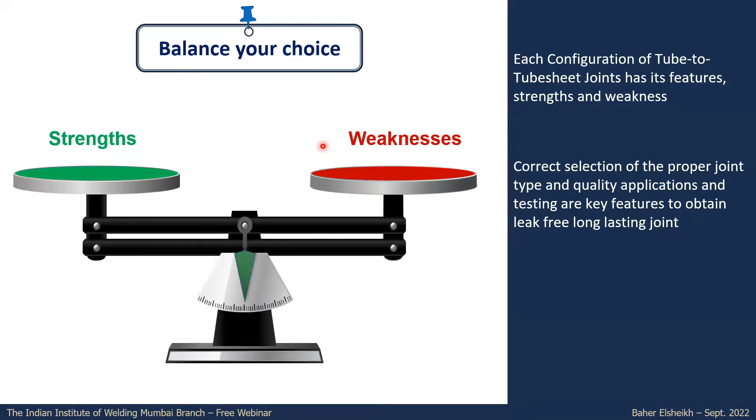Now for the different types of tube to tube sheet joints, there is no one selection that suits all applications, either from the application perspective to have the proper design or characteristics of the joint, or even from the cost perspective. That's why you need to think about the proper joint for each case. Each type of joint has its own strength and weakness, so you need to balance the features for each joint and then select or apply the proper one for your application.

Now for the expanded only joint, it is the most economical one. There is no welding associated with this, and it is easier to retube in the future. So if you're looking at future maintenance or repair, it is much easier to remove the expansion and remove the tube and reinsert again, rather than removing welding and re-welding. For future plugging with expanded only, you can easily use a taper plug, which is very simple to apply. And there is no tube sheet beveling required, meaning the machining of the tube sheet face is not required, so it's also much less work activity.

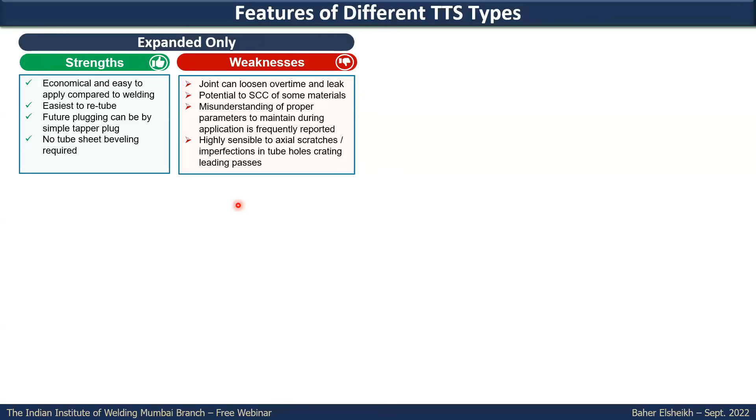But as weaknesses, it can be loosened over time, especially under cyclic load, or temperature, or high differential pressure between the two sides. And in some cases, it is potential for stress corrosion cracking if you have that much high residual stress in the application. That's why for some materials, as we'll see later, you have to limit the extent to which it will be expanded. And it's not something strange that there are frequent reports of the proper parameters not being maintained during the application of expansion, which in some cases led to frequent leaking or issues with the heat exchanger. So it looks simple, but it has its own experience and technical requirements, and it's highly sensitive to axial scratches, because once you expand the tube with the tube sheet, it will take the shape of the tube sheet hole, including imperfections and scratches.

Expanded and seal welded is much better compared to expanded only. You will have more leak resistance and sealing against leaks. So it is somehow much preferred compared to expansion alone whenever you have a slightly higher critical service, where there is no tolerance accepted for a mix between the two sides.

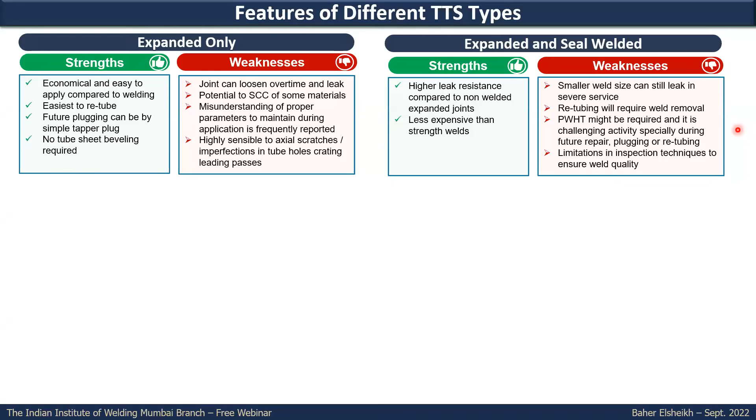The weaknesses for this one: the small weld size is still somehow vulnerable to leaking in case there's some issue in the joint. Retubing in the future will require weld removal, so more work is required. And in case post-weld heat treatment is required, especially for certain services, it will be of interest during the initial construction. The main concern here is doing post-weld heat treatment at site during plugging or retubing. It's not easy to achieve uniform application of post-weld heat treatment, and there's also the limitation of inspection techniques for the weld, which is a common limitation for all weld joint types.

Strength welded but not expanded: you can apply only strength welded without expansion. The weld size is calculated to be strong enough, as we'll see in the ASME requirements, and there is no expansion groove needed for this type of joint. So less machining and less work is required, and there's no expansion step, so that step is eliminated. But it is potential for crevice corrosion, because the backside of the weld will have a gap where fluid from the shell side can accumulate and cause crevice corrosion.

And also there's the limitation on inspection technique, which applies to all welding joint types. Retubing in the future will require removing the weld, reconditioning the bevel of the tube sheet, and re-welding again. And if post-weld heat treatment is required, it's also not easy to apply, especially during repair in the future or retubing. Future plugging cannot be done with only a taper plug.

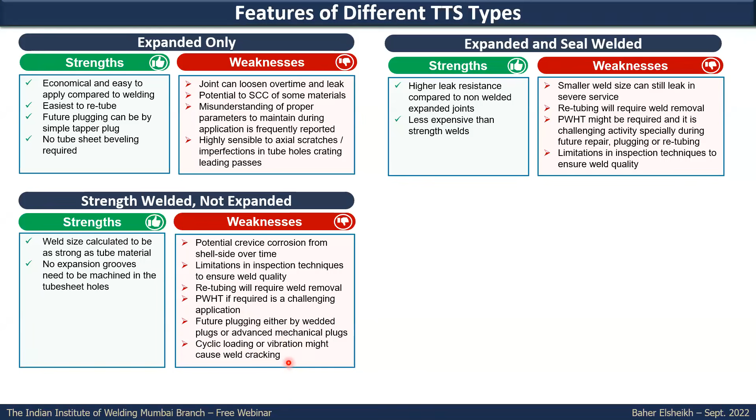You have to either install mechanical plugs or welded plugs. Under cyclic load, in case you don't have the expansion, the strength weld will be subjected to fatigue cracking, and it might crack.

The last configuration may be strength weld plus expanded, and this is the most leak resistant one. You will have the strong weld and also the expansion, which will close the gap. You will eliminate, to a very good extent, the susceptibility to crevice corrosion, and the weakness is that it is a little more intensive work, so cost wise it is higher, plus the limitation on inspection, as we said earlier.

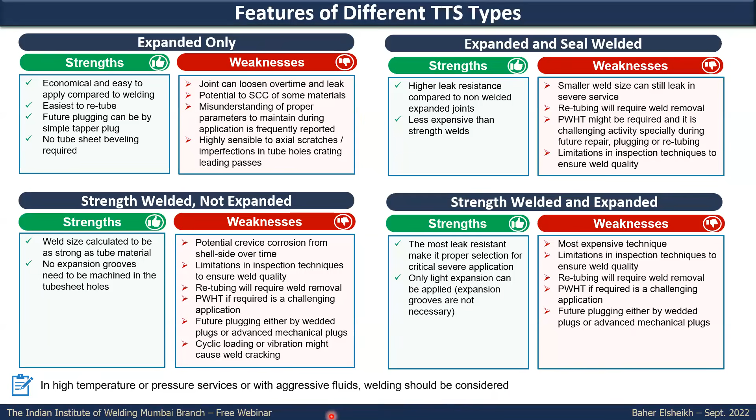And again, all the requirements for the welding here, for future plugging, post-heat treatment if required, where you need to remove the weld or apply weld again, or the application of post-heat treatment at site, which is a very challenging exercise. In high temperature service or aggressive fluid, usually you cannot rely only on expansion. You need to have welding, whether you apply strength weld plus seal plus light expansion, or expanded plus seal weld.

Now for the requirement of the tube-to-tube sheet joint, the percent of expansion. The percent of expansion recommended depends on the material used. Some materials are subjected to work hardening, or some other material might develop residual stresses in future which might cause stress corrosion cracking in service. That's why the percent of application of wall reduction, how much it will be expanded, depends on the material.

For ductile material like carbon steel or low alloy steel, you can apply up to 8%. Between the two common standards in the industry, TEMA, Tubular Exchanger Manufacturer Association, or API 660, the standard for shell and tube heat exchangers, there is some minor variation in recommendation, but almost the same approach or trend on the recommended percent of expansion.

What we can see here is that for duplex stainless steel and austenitic stainless steel, you have a little less recommended target wall reduction or expansion, while for copper alloys and also for carbon steel or low alloy steel, you can apply a higher degree of expansion without any issue.

For duplex stainless steel, we can see in API 938C, for the use of duplex stainless steel, they are recommending light expansion up to 2% only, plus strength weld, meaning you cannot apply only the expansion. But again, this is a technical report, it's a good engineering practice. We saw for some applications that up to 5 and 6% was applied in duplex stainless steel in many cases.

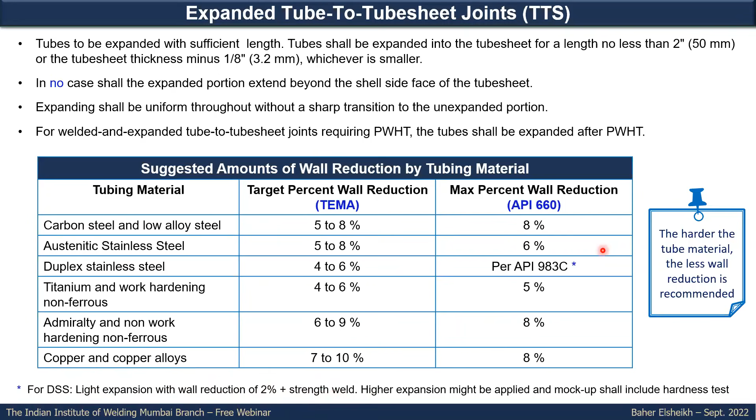Now, one factor that also contributes to how the tube will be affected under expansion is how much gap or clearance there is between the outside diameter of the tube and the tube hole. In TEMA, there is standard fit clearance or special fit clearance, and it is highly recommended to have the special close fit clearance, where there is minor or small gap between the tube and tube sheet hole, so that you don't have more plastic deformation in the tube while applying the expansion.

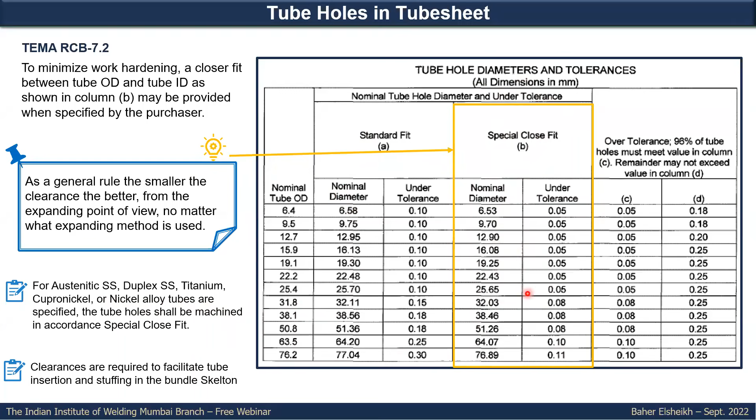Against this, the standard fit with higher clearance is in many cases preferred by the manufacturer because it facilitates the insertion of the tubes during fabrication. But as far as you don't have limitation on the material, you can apply standard fit. The best recommended practice, though, is to apply the special close fit. Especially for austenitic stainless steel, duplex stainless steel, and titanium tubes, you need to apply the special close fit clearance.

For the preparation of the tube sheet hole, it shall be clean, and there is no specific requirement for it to be polished or well machined, because somehow you need a force to grab the tube to the tube sheet hole. But it's very important to avoid any scratches or imperfections in the tubes. As a general rule this should not be there, but we also need to understand that the longitudinal imperfection is considered of higher risk compared to the radial imperfection.

Now, if this is the shell side and the other is the tube side, a longitudinal imperfection means you will have a leak path between the two sides. A radial imperfection is still not a leak path, so you can have some tolerance there. But generally, you should not have any imperfections or scratches in the tube sheet hole.

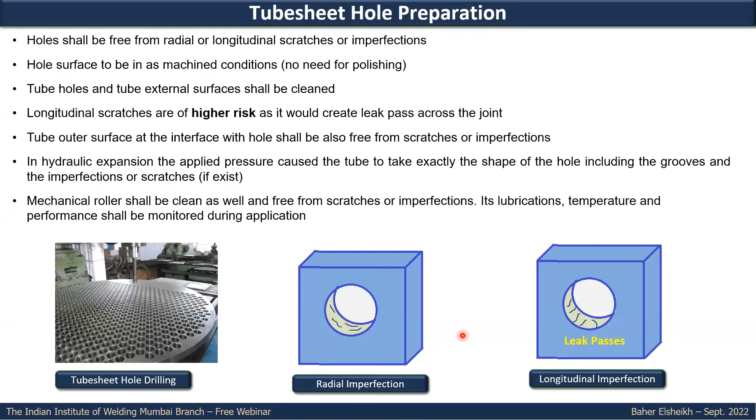When applying the two different techniques normally used in expansion, whether mechanical rolling or hydraulic expansion, as we'll see in the next slide, the hydraulic expansion will force the tube to take exactly the shape of the tube sheet hole, including any imperfections or scratches left in the tube hole. That's why it is very crucial to make it well machined, to avoid impacting the tube in future with cracking or similar issues, or having a leak path between the tube side and shell side.

The three different techniques normally used in expansion are roller expansion, hydraulic expansion, and explosive expansion.

Normally, when we need to apply the expansion, you should have annular ring grooves. The most common is to have two grooves as per TEMA requirements, but there is some exception in case you have a thin tube sheet, with thickness less than 1 inch, where you can apply only one groove.

For roller expansion versus hydraulic expansion, there is a different recommendation for the width of the groove itself. In roller expansion, it is a fixed value like 3.2 mm, while in hydraulic expansion, it is a function of the tube mean radius and the tube thickness.

We will see this exercise in a table, making a comparison for different tubes with different thicknesses, showing how much the width of the groove might be required for either mechanical roller or hydraulic expansion.

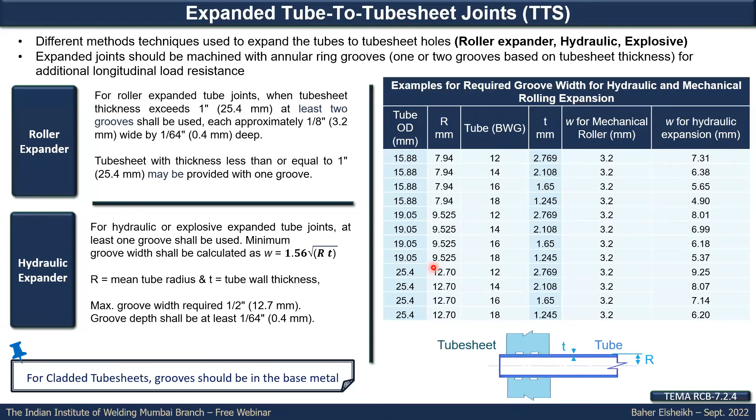You will see a major difference for the recommended hydraulic expansion width. By experience of some manufacturers, it is very important to maintain a bit higher width for the hydraulic expansion to achieve proper sealing. Especially in hydraulic expansion, the tube will take the shape of the groove because you apply pressure. So if the groove width is very small, the tube will be forced to take this shape, leading to localized high expansion, which might cause stress concentration at the edge of the groove, and in future could lead to cracking or stress corrosion cracking on some surfaces.

This is the application of the mechanical roller. There are different tools and types of mechanical rollers, with different manufacturers working on that. You need to understand that this field has its own specialty, and in many cases you need to consult the manufacturer of the tool.

There is good recommendation, well known from experience, for the roller application regarding how much pressure to apply, whether in one step or a stepwise application across the tube sheet, and how many rollers are required. For thin tubes, 5 rollers should be applied.

You also need to think about the ligaments between the tube holes, which differ depending on the pattern. We have 4 types of tube pattern: triangular, rotated triangular, square, and rotated square. In the rotated square and square patterns, you will find a bit more material in the ligament area compared to the rotated triangular and triangular patterns. This means that under the same force causing deformation in the hole, the triangular pattern will show more deformation compared to square or rotated square, assuming the same tube sheet material and thickness. This needs to be considered.

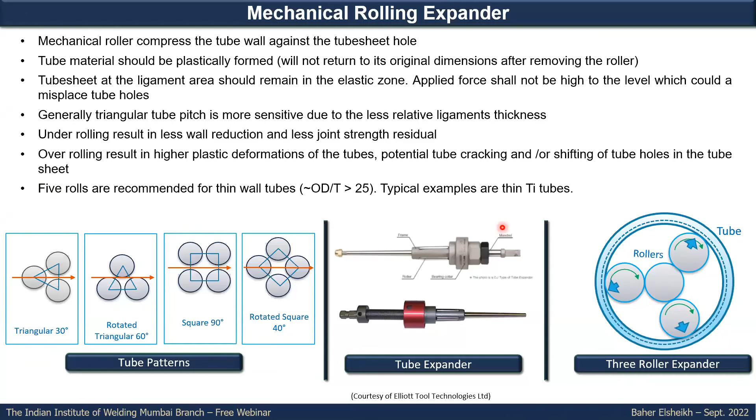The hydraulic expansion is applied by using hydraulic pressure in a tool inserted into the tube sheet hole area, and by applying the pressure you force the tube to seal against the tube sheet hole. This application, as mentioned, might be done without a groove in some cases or with grooves. In hydraulic expansion, the uniform application of pressure forces the tube to take exactly the shape of the groove, if present.

This is not usually the case with mechanical rollers, because the mechanical roll will have a little bit longer length, so the groove will come somehow within an area of the roll. So the roll has a maximum OD, and it cannot go beyond the maximum OD of the roll itself.

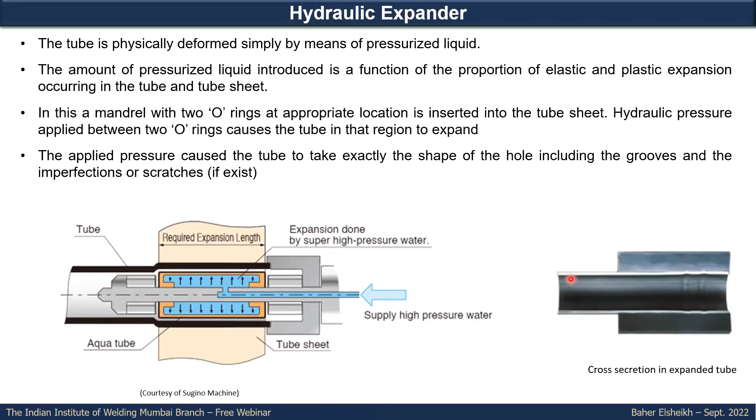But in hydraulic expansion, it is pressure that forces the tube to go and do more plastic deformation in the groove. That's why the width of the groove in hydraulic expansion needs to be well respected, like the recommendation in the TEMA and manufacturer guidance. It has a little bit wider width.

Now we come to whenever we are applying welding for the tube to tube sheet joint. Welding can be either manual or automatic, using orbital welding techniques, usually applying gas tungsten arc welding. It is highly recommended to have a minimum of 2 weld passes, and this recommendation you will find in many standards, including API 660. Two weld passes as a minimum, and might be more.

So in the selection of the filler wire, you have to respect achieving this during the application and qualification of the WPS.

One of the challenges while welding the tube to tube sheet joint is the relatively high thickness of the tube sheet. You have high heat sink, which causes a high reduction in temperature during application of the weld. That's why for materials where you need to maintain interpass temperature to avoid issues, there are recommendations for some materials.

In such cases, you might need to apply preheat, and this preheat application should be applied uniformly on the tube sheet. Otherwise, you might have an issue in the ligaments area in some thin tube sheets. This will be a very big challenge if you are working in after service for repair or doing some activities on the tube sheet.

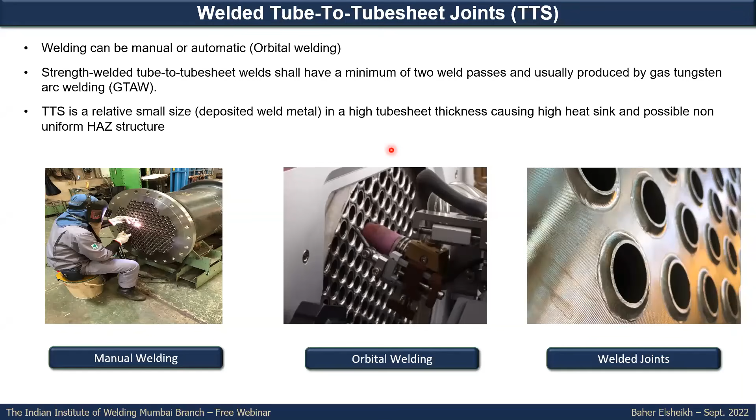Or one of the common recommendations, instead of the normal V groove, is to apply a J groove. J groove, or U groove, compared to the normal V groove, gives you a better chance to achieve full penetration of the root pass compared to the V groove, especially for small joint sizes.

And there is much known limitation for inspection of this weld joint, especially at the root pass. So in this case, it is highly advised, and in some specifications from well-known companies in the industry, they recommend only using the J groove because of this reason.

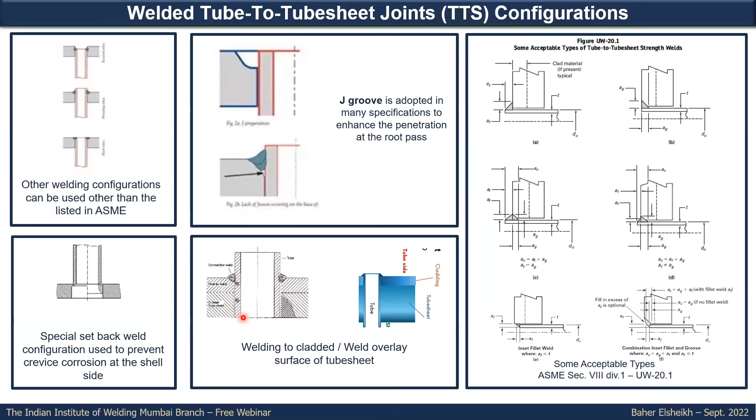In some other applications, you might apply the tube-to-tube sheet joint to a cladded or weld overlay face of the tube sheet. In some other cases, it is highly advised not to do expansion, like what we can see here, only welding - we will see later why this recommendation is advised. Those are some of the special TTS welding configurations we can see in the industry.

It's not listed in ASME, but it is somehow used in many applications. This one is a special setback weld. We normally see this in the welds of waste heat boilers in the reformer section of ammonia, methanol, and hydrogen plants, where there is a small lip in the tube sheet from the shell side, and the tube also has a lip like a step.

While welding, it will be fused together, so you will totally fuse this part and will not have any space or clearance where there could be a chance for crevice corrosion. This is highly recommended for this service because the temperature here is too high.

And in the shell side, there is boiler feed water. Even with minor contamination of the salts in the boiler feed water, you might have crevice corrosion here, of much higher risk.

And this internal bore welding, where the tube is not inserted to the tube sheet, but it is butt welded to the back side of the tube sheet. This application is called internal bore weld.

This butt weld has many advantages. You will not have the crevice between the tube and tube sheet, and you can also apply proper inspection using digital RT or UT for the weld joints. So you will have very good confidence in the quality of the applied weld as well.

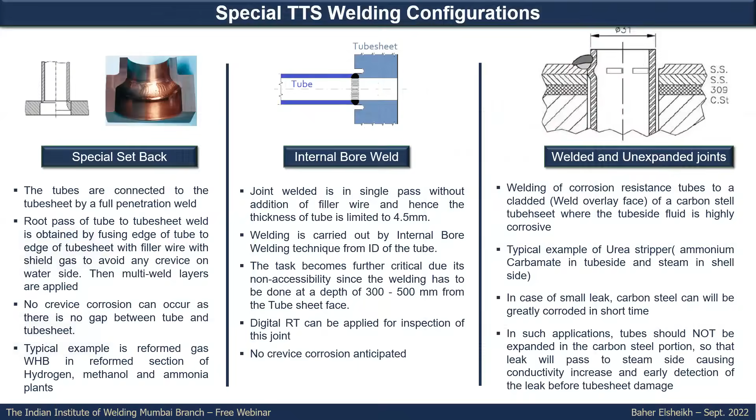Now we will have a look at how ASME Section 8 Division 1 calculates the required thickness or throat for the different weld joints of the tube to tube sheet.

As we said earlier, there are two types of strength weld: full strength weld and partial strength weld, and also, if you remember, the seal weld. But for seal weld, there is no calculation required. It is only a supplementary requirement for sealing by the expansion, so no calculation is required.

But for the full strength and partial strength weld, there are some equations that need to be applied where you can calculate the minimum dimension of the weld required.

And if you can see here, the recommendation for the full strength weld compared to the partial strength weld: the full strength weld is more stringent, as you can see. Here it is whichever is greater, AR calculated from the equation or 1.4 t, while for the partial strength weld it should only be greater than AR. You will see the same for the different configurations.

So as an initial understanding, you will see the AF, the weld size or the weld leg here, should be greater than AR or 1.4 t, meaning under any condition this AF should not be less than 1.4 times the tube thickness. It might be higher, but it should not be less than this. While in the groove, T is acceptable up to T in case AR is less than the thickness.

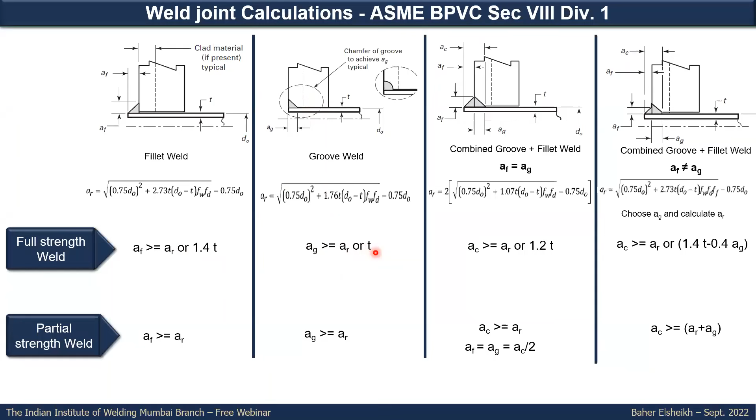We will have later an example of how to calculate it when we talk about the minimum leak path. Now for the welded and expanded configuration.

There is a very famous question asked many times when we have the configuration between expansion and welding, both applied. What do we have to do? Expand first then weld, or weld first then expand? There is no single answer that says this is highly recommended, but you need to understand the pros and cons for each application, so you might select the most proper choice for your case.

If you are doing the expansion first, then the welding, the expansion will close the gap between the tube and the tube sheet hole. So in this case, while applying the weld, you will close the gap where the weld gases should escape.

So you might have a higher chance of weld porosity, especially in the root pass of the weld. Also, the welding after the expansion, the heat from the weld and maybe from the post-weld heat treatment, if required, will cause some loosening of the expansion. So whatever expansion you have done earlier will not remain intact after applying the welding.

One feature of doing expansion first is that you can do some testing, like a leak test or hydro test, to confirm that your expansion is intact before applying the welding. But if you think of the opposite, welding first then expansion...

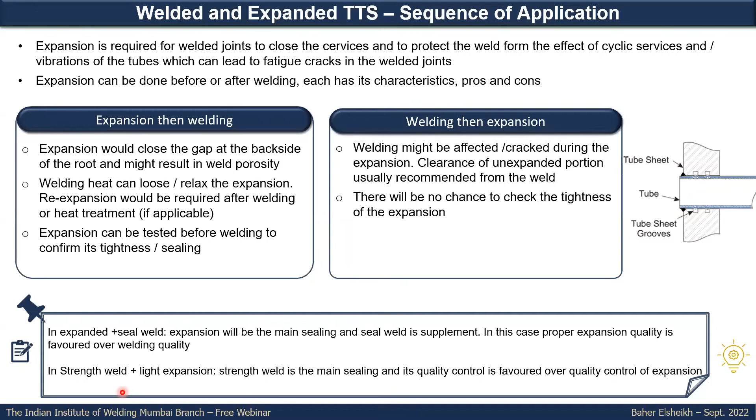For the application of the cladding or weld overlay tube sheet, it is required to apply the cladding to the tube sheet in many situations, like having corrosion resistance of the tube sheet face in case you have corrosive media, instead of having a solid tube sheet from a higher material or high corrosion resistance alloy.

This is done to reduce the cost or the fabrication requirements, so only the weld overlay or cladding surface will be applied here. In some other cases, it's also to avoid a dissimilar weld between the tube and the tube sheet.

So if you have matching material from the cladding layer or weld overlay layer with the tube, you'll avoid the issue of the dissimilar weld, which can cause cracking under thermal expansion, or also avoid galvanic corrosion.

In some cases, we are applying the weld overlay so that in future, whenever we need to apply plugging and the plug needs to be welded to the face of the tube sheet, you will not require heat treatment. So if the base metal is, for example, chromium-moly steel, and you applied some grade of austenitic stainless steel or nickel alloy, in future if you need to plug and weld to the tube sheet face, you can do it easily without needing to apply post-weld heat treatment again.

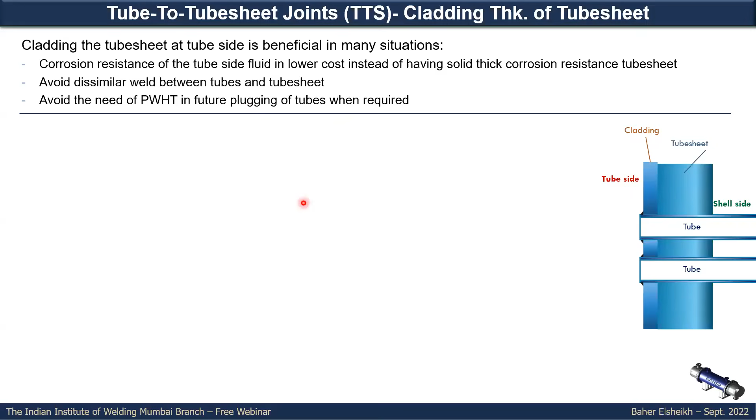We will notice something here about the recommended clad thickness. In case we have to expand only the tube to tube sheet joint, the clad thickness should usually be higher compared to the requirements when you have welding.

Why? Because in case you need to do sealing by expansion, you should have enough sealing distance between the material of the tube and the alloyed clad part. Otherwise, if it is a small expanded part, you'll have a higher chance of the media escaping to the lower grade material, which might be affected by corrosion.

But in welding, the sealing is done by the weld to the clad, so you don't need much higher thickness here. You only need enough thickness to respect the corrosion resistance and account for dilution in maybe the first or second passes between the clad material or weld overlay and the tube sheet.

We will see the same approach applied in two standards, API 660 and TEMA. In API, they are asking for 10 mm cladding thickness in case you have expansion, and 5 mm in case you have welding.

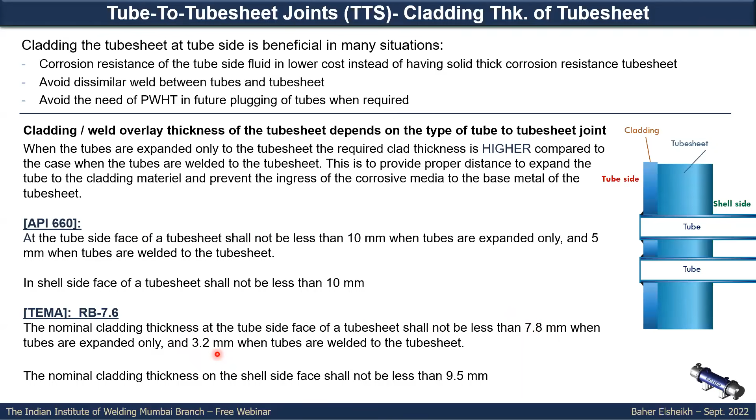In TEMA, the same approach but different values. They recommend 7.8 mm for the expansion and only 3.2 mm in case you have welding.

There are 3 different techniques known in the market for the application of the cladding or the weld overlay: explosion welding, hot roll bond, and weld overlay.

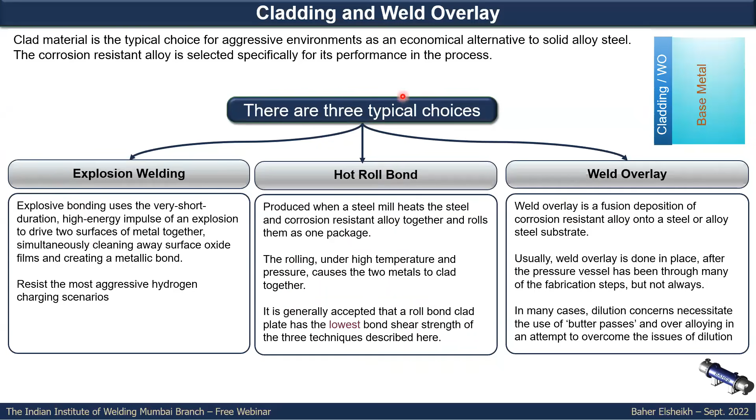If you have hydrogen service, you have to be very careful about selection of the type of the weld overlay or the cladding. Hot roll bond somehow has one of the least bonding between the cladding layer and the tube sheet base metal, that's why it is highly not advised or recommended for hydrogen service. In opposite, you can apply the weld overlay or maybe the explosion welding, which has some acceptable bonding compared to the hot roll, which is not recommended for hydrogen service.

One of the main features you have to respect and do in high quality and properly is the understanding for the mock-up of the tube to tube sheet, especially for the welding application. We will see in ASME boiler and pressure vessel code section 9, QW 193, the recommendation for the application of the mock-up. Each welding procedure should have a mock-up, and also each welder qualification should have a mock-up. For the welder qualification, you should have a mock-up with minimum 5 tubes, and for the mock-up for procedure qualification, you should have minimum 10 tubes.

The material should match the material which will be used in the production. And whatever the testing required, as we will see in the next slide by ASME, you need to think about it carefully. If you have special requirements for the service, you need to respect them, like hardness, for example, for sour service application.

One thing you need to think about while selecting the material for the mock-up for the tube sheet: in many cases they are using tube sheet from similar material, not exactly the material used in the application or production. This might produce some misleading results, especially if you have improper properties or quality of the heat affected zone in the tube sheet side.

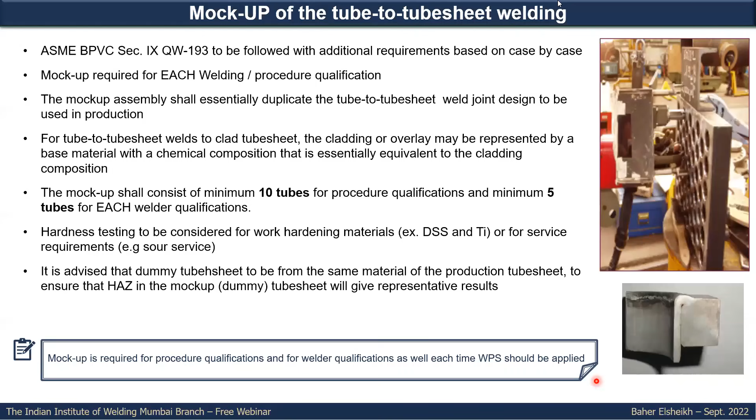For the mock-up procedure, here are some recommendations. First, you need to be careful before applying the mock-up that you should have a detailed procedure of what should be applied. Here we are providing some suggested or recommended step-by-step procedure for the application of the mock-up.

First, you have to check the condition of the tube sheet hole and the tube surface. Measure and record the actual hole diameters of the tubes, inner diameter, tube thickness of all tubes, and for the hole as well, and this has to be well recorded and marked. Then follow the sequence of the expansion and the welding as agreed in the production - you might do expansion first, then welding, or whatever agreed, you have to apply.

Then do the visual examination. You have to see complete fusion, free of visual cracks, porosity indications, and there should be no evidence of tube burn through. Then apply liquid penetrant testing, and it is highly advised to apply it for the root pass and again for the final pass. You need to measure and record the actual tube ID after the expansion to calculate how much reduction occurred.

This is for sure for the expansion cases, and then do the macro examination. While doing the macro examination, ASME recommends magnification 10x to 20x, but actually it is highly preferred to be 20x or maybe even 25x, to have a good representation of any lack of fusion, porosity, or lack of penetration. The quality of the weld joint is highly crucial for the long lasting lifetime of the heat exchanger. Then you need to calculate and check the minimum leak path, and make sure there is no evidence of cracking and that it has complete fusion.

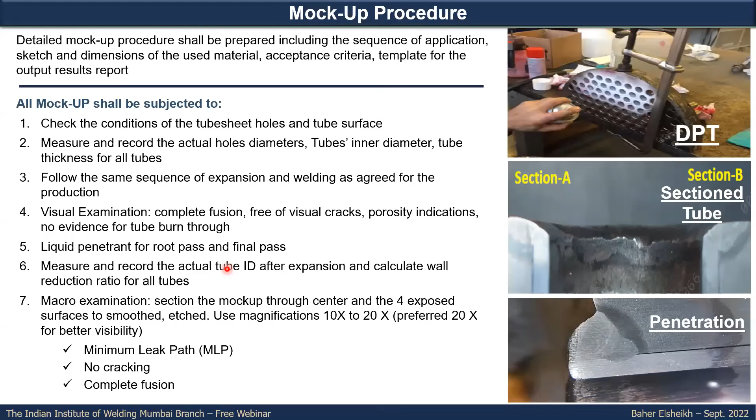This is how the methods for how to measure the internal tube bore, and this equation from TEMA, how to calculate the measured or the expansion ratio. And this is an example for some of the calculation.

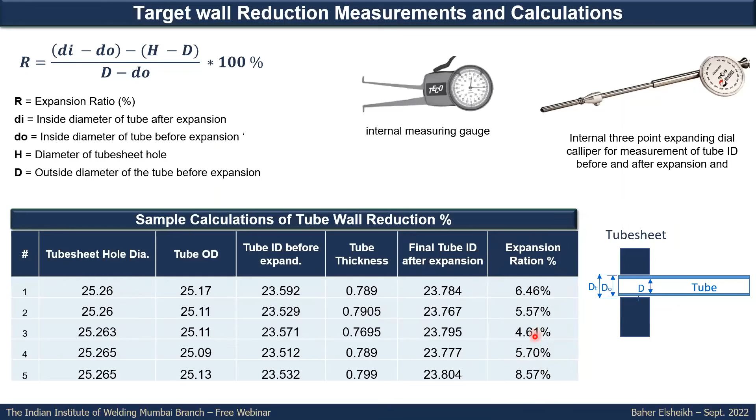We measured everything: tube sheet hole, tube OD, tube ID after expansion, and tube thickness. Those measures should be the actual tube and hole dimensions measured during the mockup, not something from the drawings or from the recorded value. Because if you can see here, 0.2 something mm will have an impact on the calculated expansion ratio. Then you need to calculate the expansion ratio and compare it with the recommended value, how it should be.

Now for the minimum leak path. Minimum leak path is the minimum path where the media can leak, and it can be defined as the minimum distance in any direction from the root of the TTS weld to the nearest surface. As you can see here in this photo, it is the radius of the largest circle which can be totally inscribed inside the weld, and whose center is the weld root. So you might in the drawing have some circles, and it should be the greatest one which is fully enclosed. So the radius of this one will be the minimum leak path.

Minimum leak path depends for sure on the configuration of the joint, whether it is fillet, grooved, or fillet plus groove, and also the actual shape of the application during the mockup. Some concavity, convex, the actual geometry used, like that.

If you see here the recommendation between API 660 and ASME section 9: in API 660 they mention that the minimum leak path shall be minimum 2/3 of the nominal tube thickness. In ASME section 9, they say it should meet the required design, but there is no specific requirement how to calculate or how to measure.

We will see in the next slide how to think about that. First, if you see the different configurations here, just think about what might be the minimum leak path. If you are saying from the design perspective during the design itself, in this type of joint, the fillet one, this will be the minimum leak path, the throat.

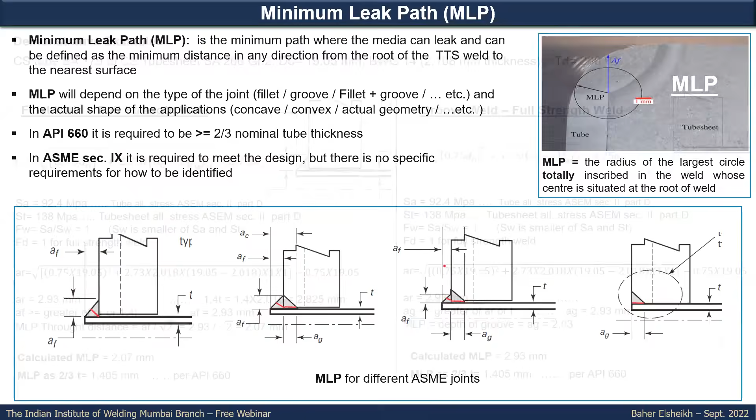So from this, we will see in the next slide our example, if we respect the design to meet the requirement as section 9 said, we'll see how to apply this in our test. We will assume here an example just for illustration.

A tube of carbon steel, SA-179, welded to a tube sheet SA-266 Grade 2, all carbon steel. Tube diameter is 3/4 inch, and BWG14, which is 2.108 mm. Design temperature is 200 degrees Celsius. We assume this to build two examples, one for fillet weld and one for groove weld.

The same equation, if you can remember from UW-20, here we will use for calculating how much AR is required. From the AR we calculated, we get the allowable stress from Section 2 Part D for the tube and for the tube sheet, and then get FWFD, which will be used in this equation. Here, if you can see, the AR calculated result is 2.93 against the tube thickness of 2.108. So it is higher than the tube thickness.

As per the recommendation for the fillet, AF should be the greater of 1.4t or the AR. So here 1.4t is 2.825. So AR is higher than 1.4t, so AF will be 2.93, like the AR.

The minimum leak path here from the design perspective will be the throat. If we calculate the throat, it will be AF over square root of 2, so it will be 2.07. So from this calculation, if we respect the design code, this is the minimum leak path for the design configuration. In this case, MLP is 2.07 mm.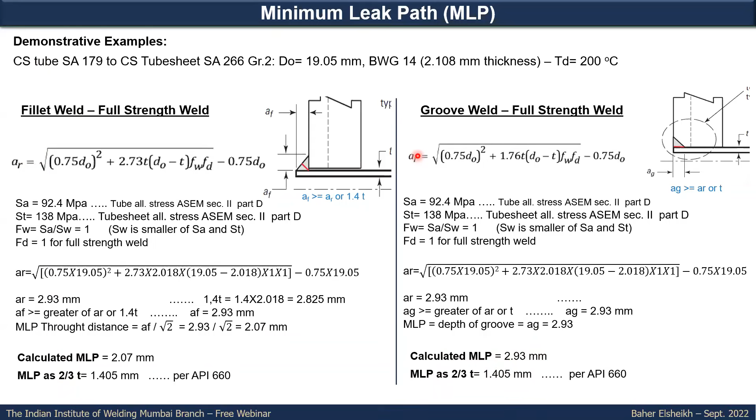It might be in the first part of the tube, and also in the face of the tube to tube sheet joint. We might have stress corrosion cracking, and the crevice corrosion from the shell side also might affect the joint.

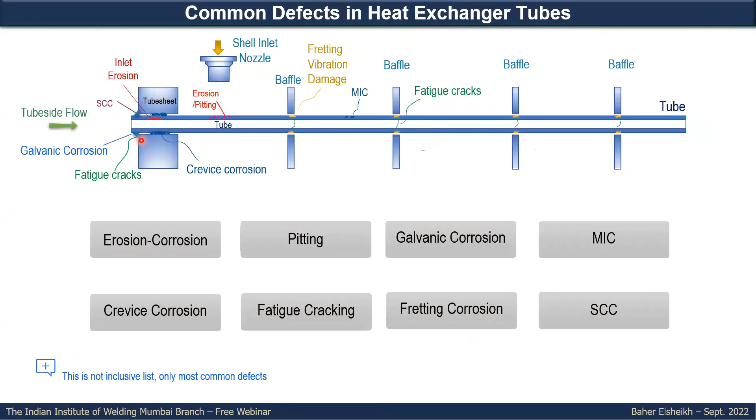As a general thinking, corrosion might happen by the combination of environment, material, and stress. Environment, stress, and material together, if the condition can be applied for stress corrosion cracking to have the three required factors. Environment with stress only, you might have corrosion fatigue. Material with susceptible environment, you might have corrosion, and material with stress, you might have fatigue.

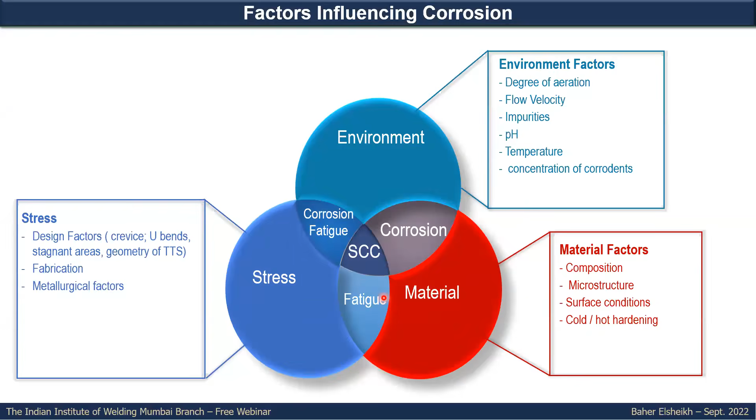The most common for the tube to tube sheet joint, first we will start with crevice corrosion. Here is an example of crevice corrosion from the back side of the tube, where you can see the full tube thickness has gone, and you can see the leak directly there.

For crevice corrosion, as per this curve we get from the NALCO guide to cooling water systems, there is some incubation period for the crevice corrosion, which usually in many cases is about 1 year more or less. Then you will have some exponential acceleration rate for the corrosion attack.

To close the crevice or eliminate this crevice corrosion, you need to think about proper expansion of the tube to tube sheet so that you can close the crevice, or you might think about using the setback weld to expansion or setback weld, or the internal bore if applicable or can be applied.

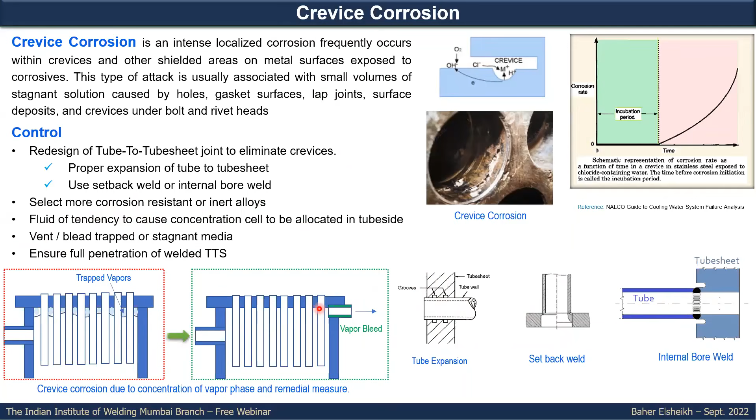You might select a more resistant material, so the condition is there but the material has higher resistance, or maintain the condition of the fluid itself to somehow reduce the tendency to cause corrosion. In some heat exchanger designs, you might have vapor bleeding to avoid the stagnation of trapped vapors.

For pitting attack also, you can see it in the tube to tube sheet joint. You can think about using resistant material with higher pitting resistance equivalent number, or avoid stagnation - it is highly recommended to have the tubes flush with the tube sheet, especially for vertical heat exchangers, to avoid deposition or accumulation which might cause pitting and corrosion in the tube face, including the tube to tube sheet joint. You need to maintain the protective film of the material.

In many cases, in some services, you might intentionally add some oxidizing material to maintain passivity, like in some boiler feed systems, or in some application of carbamate in urea plants. And avoid condensate corrosion by maintaining temperature higher than the dew point, like in the case of CO2 services.

Erosion corrosion - this photo shows high erosion to the face of the tube sheet, including the tube to tube sheet joint and the inlet or first part of the tube itself. So over time this might cause metal loss leading to a leak here.

So you might think about changing the configuration or geometry to avoid such high impact of erosion, or utilizing impingement protection in the channel itself, some perforation, something like that, to protect the tube from direct impingement, or improve the resistance of the material by having higher hardness material.

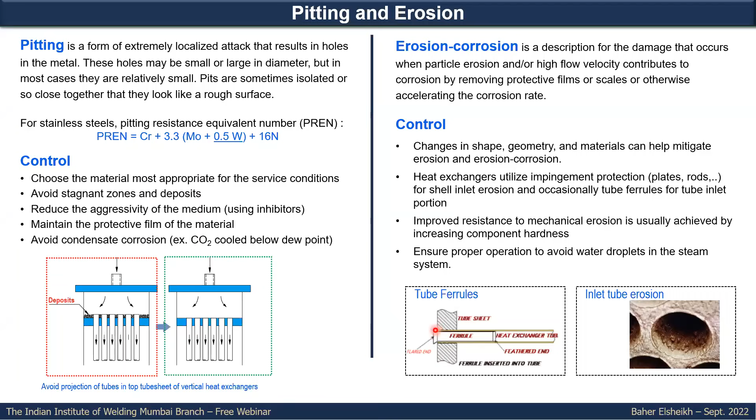For stress corrosion cracking, as we said, the material, environment, and stresses all should be present. It is one of the most common issues in this tube to tube sheet joint. It is somehow linked in many cases with crevice corrosion. In case you have a crevice, you might have an attack on the weld by stress corrosion cracking.

To avoid and control it, you might need to use higher resistant material. You need to avoid residual stresses, and to do that you need to think about the way you applied the weld, the ratio of expansion applied, and having a clearance between the expanded part and the weld. Don't apply the expansion up to the weld or with minor clearance to the weld, or you'll have higher residual stresses or stress concentration in this area.

Apply the proper expansion. Full weld penetration is highly crucial in avoiding that. Otherwise, the root pass will be an initiation point - it might be considered a crack initiation site in many cases of stress corrosion cracking services.

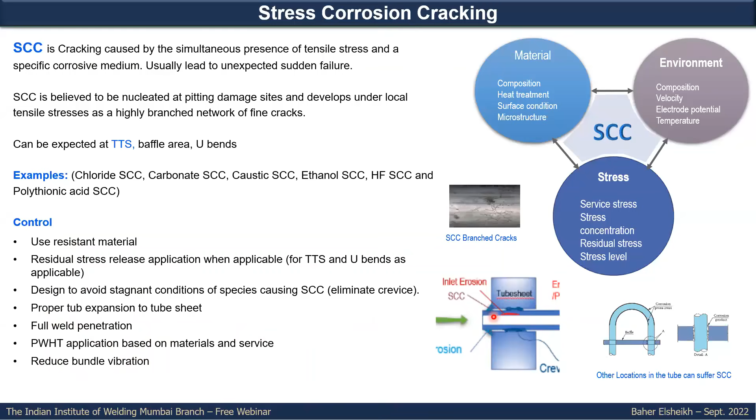Also, from the service perspective or the design of the heat exchanger itself, you need to reduce bundle vibration or cyclic service. Otherwise, when the tube vibrates, all these stresses from the vibration will be converted directly to the weld joint, leading to cracking or stress corrosion cracking.

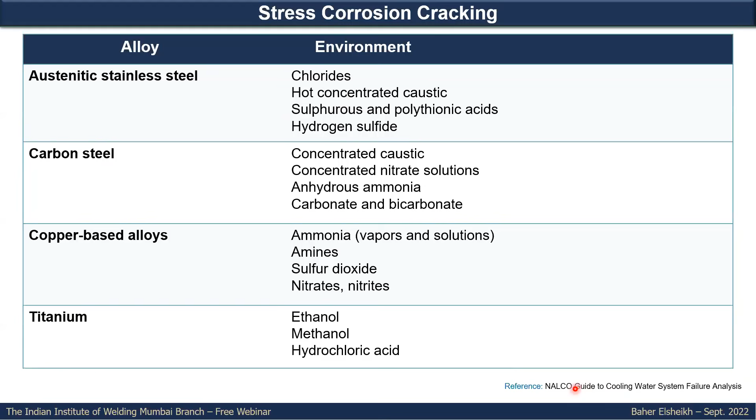This is a table for the most common services causing stress corrosion cracking in some materials. After the session, we will share this material in PDF format with all attendees, and this table is referenced from the NALCO guide to cooling water system.

For galvanic corrosion, you can see the preferential attack of the tube to tube sheet joint in some galvanic corrosion cases, and it is not something uncommon. You can see this in the industry, and you need to think about, as mentioned earlier, applying cladding to avoid dissimilar metals, so you will not have the differential potential which causes galvanic corrosion.

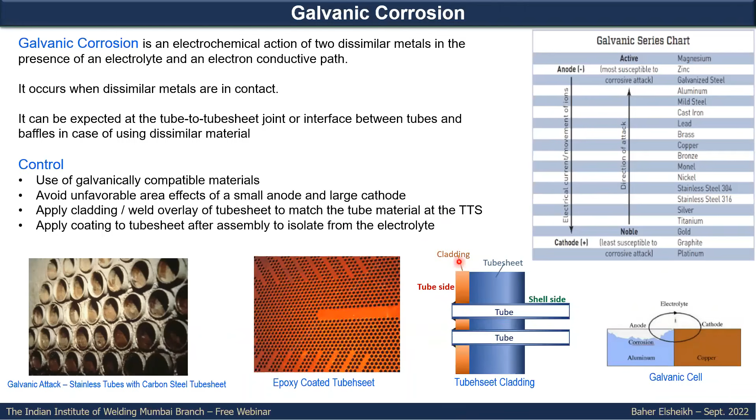In some cases, you might apply special coatings like epoxy coating to the face of the tube sheet, and also including the tubes. In many applications this is applied, and it has a good effect on eliminating or mitigating galvanic corrosion.

Here's a summary of the most common weld issues we can see in the tube to tube sheet joint. Porosity, which might be caused by insufficient shielding or purging gas, or unclean base material or filler. You have to use sufficient flow of shielding or purging gas, or proper cleaning before the application of the weld, the base metal, and the filler wire as well.

Lack of fusion - improper welding parameters, low current, high speed - these might be the causes. This is one of the most common issues in the tube to tube sheet joint, both lack of fusion and incomplete penetration.

For incomplete penetration, whether by controlling the weld parameters or from the design perspective to have a proper groove size or shape, you can have a better chance of applying good penetration for the weld itself. Also, selecting a smaller filler wire size can help ensure proper penetration during the application of the root pass.

Burn through can be seen in thin tubes in some applications, and you need to control the heat input to avoid that. Undercut is caused by high current or maybe long arc length - use proper welding technique and parameters.

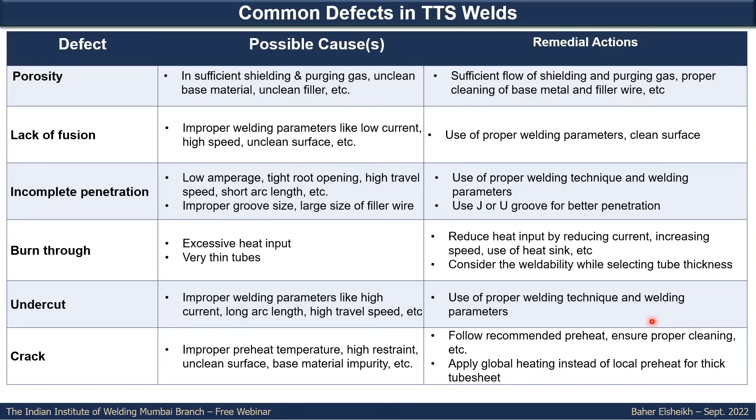Those are the most common inspection techniques used for the tube to tube sheet joint, whether after or during fabrication, in-service inspection, or during repair activity: visual examination, surface examination by DPT, and volumetric examination by UT, though this technique is limited to some configurations and not commonly used.

In-situ replica can be applied, but it is also challenging because the tube and weld itself might not have enough landing space or area to apply the replica.

There's also the helium leak test, hydrostatic leak test, and for erosion or expansion during service, you can check how much the actual tube ID has changed using calipers like what you see here.

Radiographic examination, RT, is a relatively recent technique - it's not something common in the industry. We can still see some manufacturers talking about it, but it's still not commonly used in the industry.

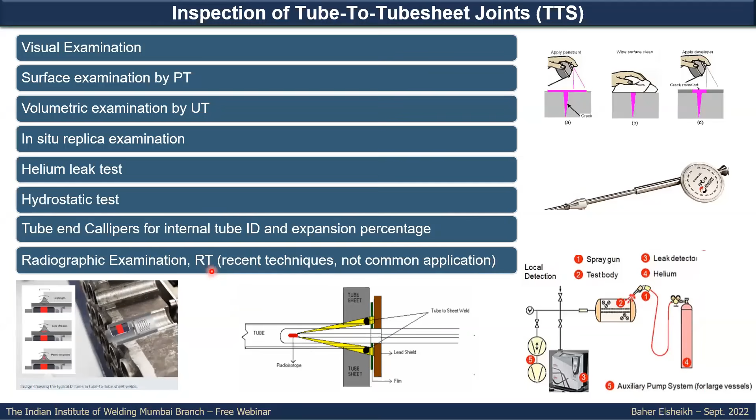Now, this section will talk about the leak repair.

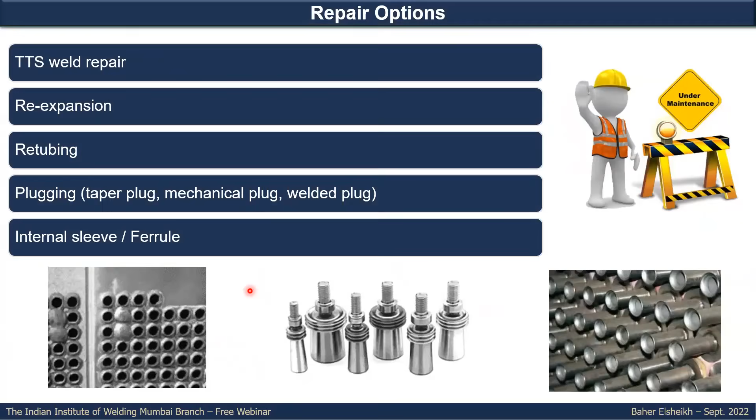Whenever you have a leak, you might think about whether to do weld repair, re-expanding, or retubing, or plugging. In plugging, you might have a taper plug, mechanical plug, or welded plug, or apply an internal sleeve or ferrule to protect the tube.

Here's a recommended or suggested procedure for the weld repair. First, you need to grind out the affected part, and this shall be done very carefully, especially in case you have a crack, since during the grind out, the crack might propagate. This is a risky application, so it's preferred to have a pencil grinder with careful application, although it is time consuming.

Then apply stepwise DPT to confirm that the full defect is already removed. Then apply the welding first pass, do DPT for this pass. You might apply a pre-leak test after the first pass to confirm its intactness and integrity. Then apply the second and filling passes, and DPT again.

If post-welding treatment is needed, you need to apply it, and it is something challenging. Application of the post-welding treatment inside the tube sheet is not an easy application, to confirm uniform and proper heat distribution. It shall be carefully applied, and in some cases you might need to do finite element analysis to confirm that thermal and mechanical stresses during the application are within accepted values which will not harm the equipment.

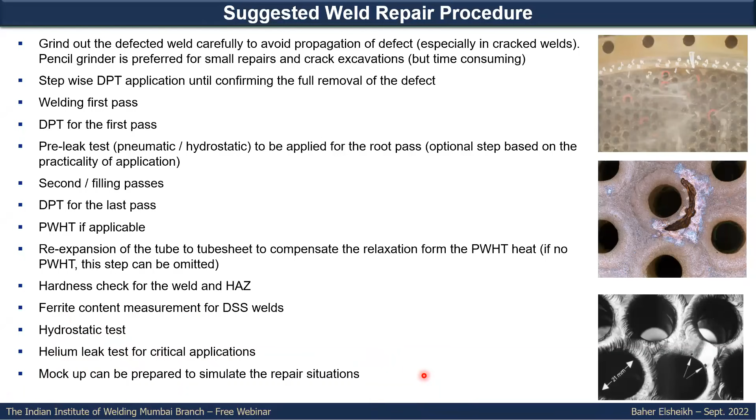And if you apply this, you need to do the expanding again, the hardness test, ferrite content if applicable, and the final hydro test and helium leak test if critical service requires it. During the preparation you might do a mock-up, especially for critical equipment, before trying any repair.

For the plugging, we said we have many types of plugs. This is the most common and simplest one, the tapered plug. The tapered plug is to be used, and as we can see from ASME PCC2, it is somewhat limited to lower pressure and temperature, and also used in cases where the tube-to-tube sheet joint is not welded.

During the application of the plug, it is recommended to pierce the tube beforehand. Here we are talking about plugging tubes with thickness loss that are not leaking -- if it's leaking, no issue. But if it's not leaking, you need to apply some piercing of the tube, because if you apply a plug without piercing, some media will be trapped in the tube, and during service and heating it will create vapor pressure. Increasing pressure might cause the plug to fly out and cause an incident. So it's highly recommended to pierce the tube as per PCC2 -- two holes need to be applied before applying the plug.

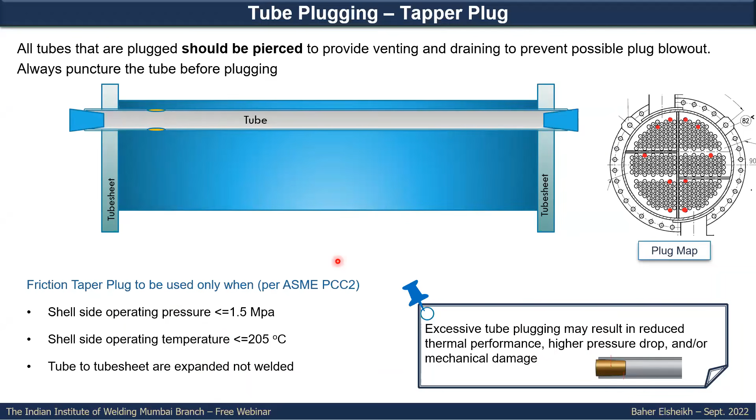Plugging means you are restricting the flow, so it might impact the pressure drop and thermal performance of the equipment itself. And later, when we see the mechanical plug, even with the welded plug, the integrity itself might be impacted.

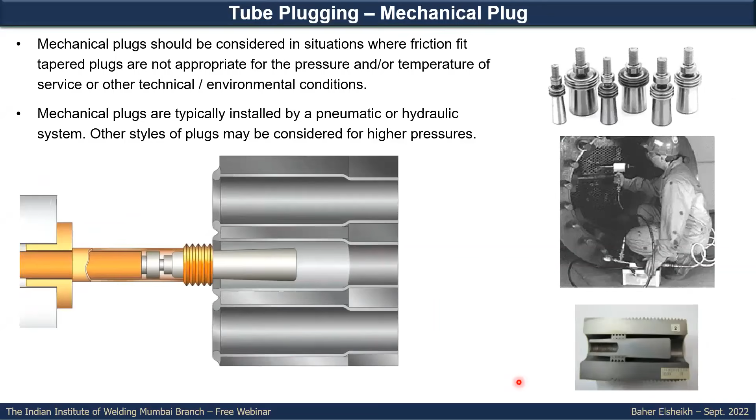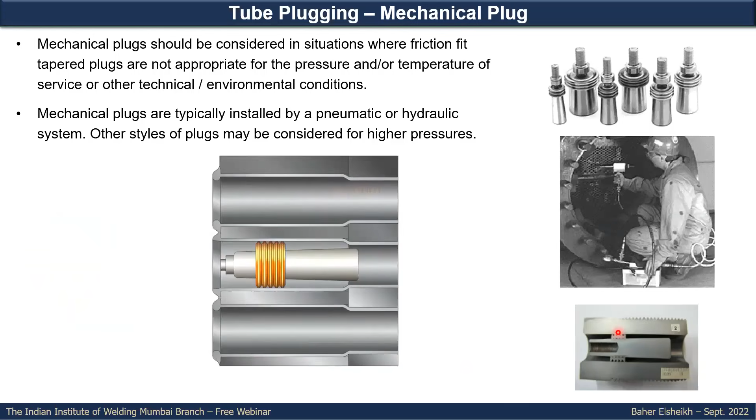This mechanical plug is somewhat recommended or can be used for higher pressure applications. If you can see here from this illustrative graphic how it is applied, it is inserted, then by hydraulic machine the inner part is pulled, and while pulling, since this is tapered, it is like a labyrinth. This labyrinth will be sealed against the tube and force the tube also to seal against the tube sheet.

Welding -- you need to think about the application of the welding here. A mock-up is highly advised to be prepared before the application, especially for qualification of the welders. In some cases, just starting to address a leaking part by welding might create issues for the other adjacent tube. So this application shall be done with high care.

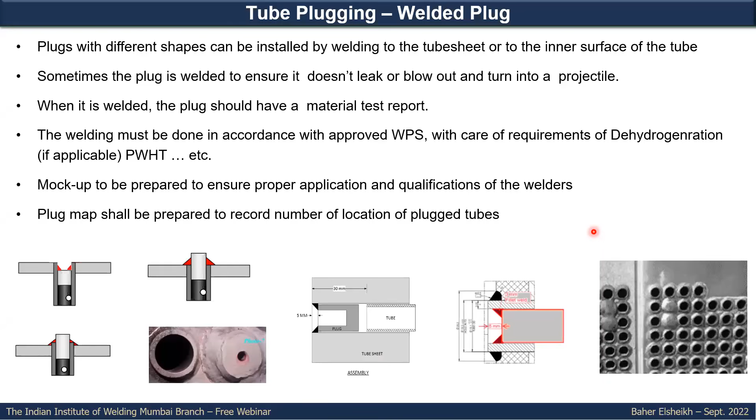Now this is our last part. We will see some case history showing some good cases like this one.

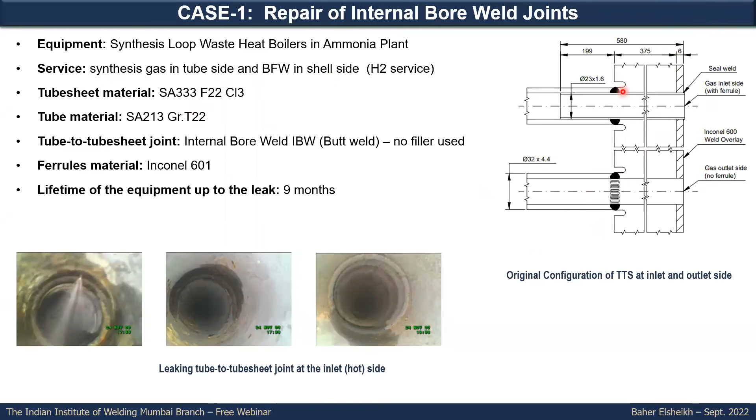This was internal bore weld, and this internal bore weld, if you can see in this photo, it was leaking from the weld itself. The service is in hydrogen service, and there is a weld overlay here, but welding between the tube and the tube sheet, as you can see in this configuration. This one was repaired at site, where they installed some ferrule inside the tube and welded to the tube inner surface from here and the tube sheet surface from the outer side.

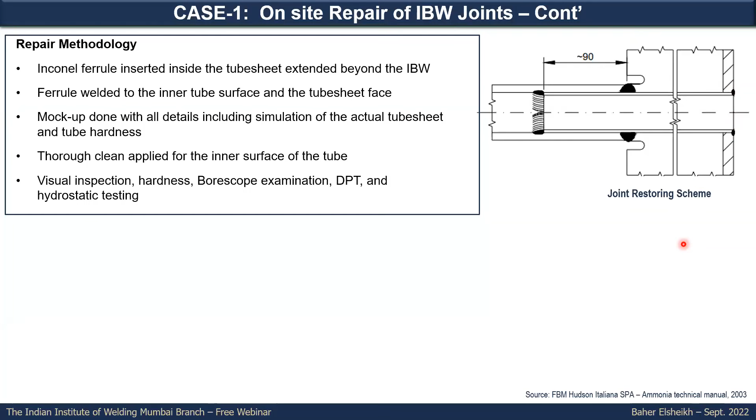They have made many mock-ups until having good confidence in the applied technique. During the investigation, they took a sample from the failed tube, and the conclusion was that it was actually in service for a short time, and they found it is related to improper application of the initial mock-up during equipment fabrication.

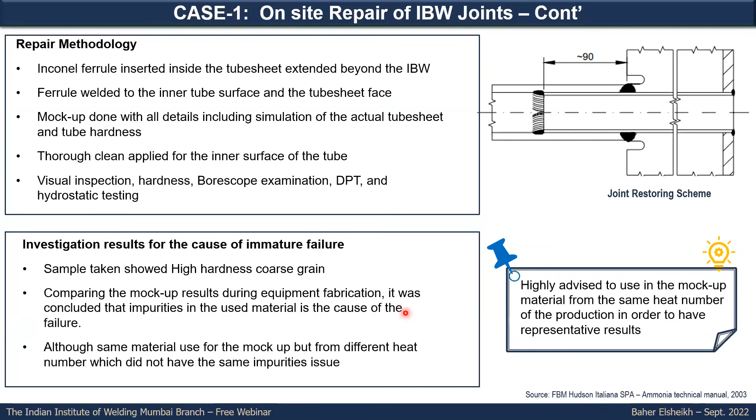They used tube sheet material that is similar but not from the same heat number, and when they examined the sample from the actual failed tube sheet, they found coarse grain, high hardness, and some impurity material in the tube sheet. So somehow during the mockup, if they use the same part from the production material itself, you will have representative results and avoid such issue.

This is the second case. This second case was a waste heat boiler in an ammonia plant, and cracks were found in many parts, including the tube sheet joints. The tube material is austenitic stainless steel, and the cracks are stress corrosion cracking from the boiler feed water side, from the shell side.

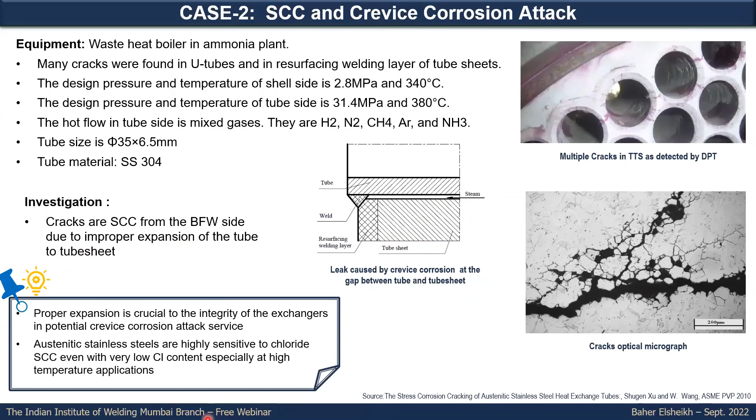It is due to improper expansion of the tube to tube sheet. That's why proper expansion to avoid crevice corrosion is highly crucial to the equipment in many cases, especially whenever you have material susceptible to stress corrosion cracking.

This is another interesting case. This is a high pressure carbamate condenser. Some pinhole in one of the TTS, a minor one, caused the carbamate from the tube side to pass to the shell side.

And if you can see here, this photo after removing this part, there is a very big cavity in the tube sheet, carbon steel tube sheet. This happened in a short time because carbamate is highly aggressive media, and that's why, as we said, there is no one solution fits all.

In the previous case history, we said crevice corrosion shall be closed by proper expansion - it is highly crucial, you have to follow this. But in this case, it is highly recommended not to do expansion and instead leave a clearance or gap between the tube and the tube sheet hole, so that in case of some leak, it will pass easily to the shell side.

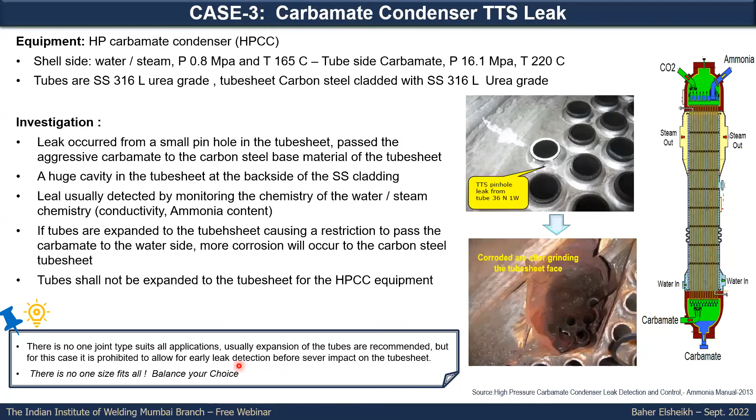Once passed to the shell side, there is some online monitoring for the water parameters. So the conductivity will increase sharply, and ammonia will be detected. So you might have good time to attend to the equipment before it has such massive impact. So as we said in our initial slide, balance your choice for the selection of material.

This is another case history for a heat exchanger that was in service for a very short time, only 30 days. After 30 days in service, cracks initiated exactly beside the root of the tube to tube sheet joint. It is carbon steel, welded and expanded, and during the investigation they found some lack of fusion in the weld, and also the expansion extended up to the weld joint.

That causes stress concentration, which they confirmed its impact by finite element analysis. And somehow, in such a short time, there is definitely some contribution from cyclic service or vibration in the bundle itself causing this attack. That's why weld quality is very crucial.

Inspection techniques are somehow limited, especially for the weld pass, so mock-up is very important to apply to ensure the quality of the joint. You should also have enough clearance between the tube and the tube sheet, so that there is enough clearance between the expanded part and the weld of the tube to tube sheet, so you will not affect the weld by cracking or high residual stresses or stress concentration in this area. Also, based on the service, you have to mitigate vibration, and this is mainly part of the thermal and performance design.

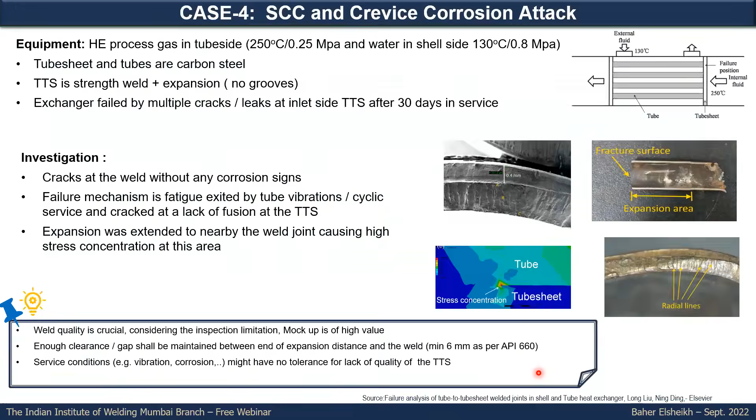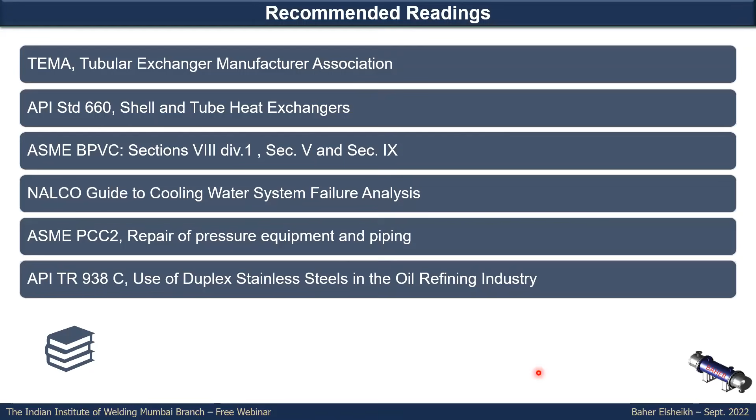By that, we have come to our suggested reading - maybe TEMA, API 660, ASME boiler and pressure vessel code, NALCO guide for cooling water systems, ASME PCC2, and API technical report 938 for duplex stainless steel. Now we came to the end of our presentation, and Dr. Krishnan, please, you might go for the discussion.

Hello? Krishnan. Hello. Yeah. Hello, Dr. Krishnan. Dr. Krishnan. Hello. Yeah. Let me check.